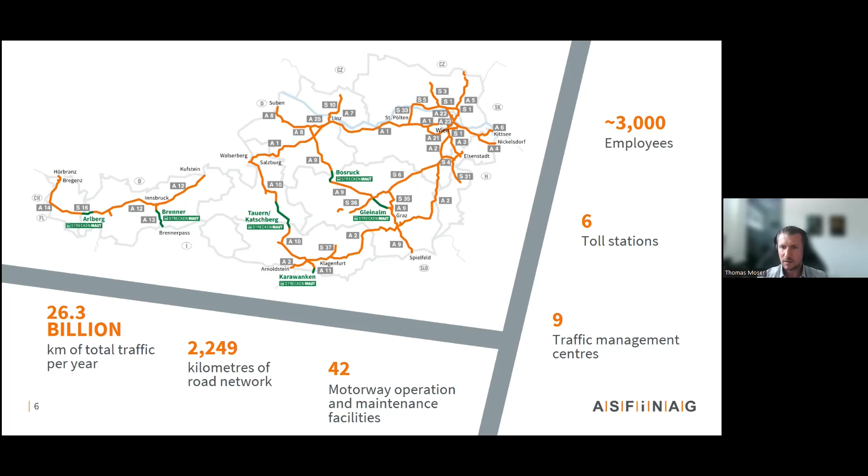And furthermore, we have 6 toll stations for our special toll routes. These are, for example, the Karawankentunnel, Tauern-Katschberg, or the well-known Brenner. And all these tasks are provided with about 3,000 employees.

So let's get to our main assets. What are the main asset categories next to bridges?

First of all, we have the pavement, which is one of the most important asset classes of all infrastructure owners. We have a total length of 2,249 kilometers, which means 12,200 lane kilometers, and an area of approximately 53.55 million square meters of pavement and asphalt, where about 2/3 is asphalt and 1/3 is concrete pavement.

The next important assets are the bridges. We have 5,818 bridges with a total area of 5.8 million square meters, which means our average bridge is about 1,000 square meters. Due to our topology in Austria, we have, in relation to our net length, a high amount of tunnels.

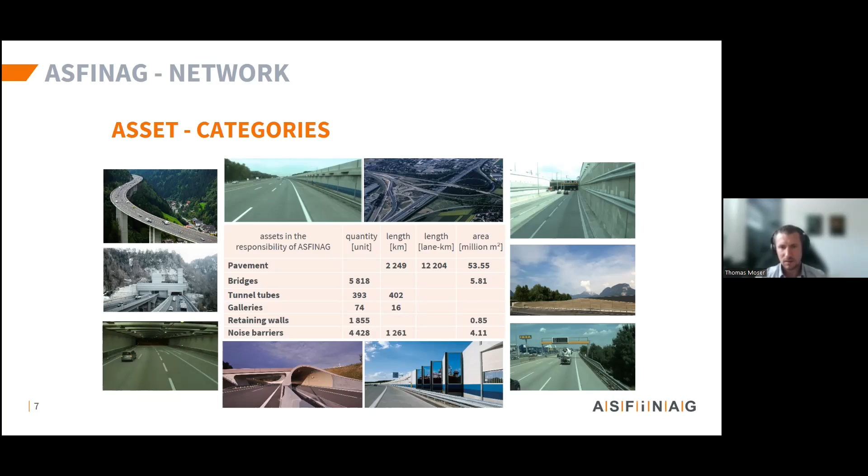We have 393 tunnels with a length of 402 kilometers.

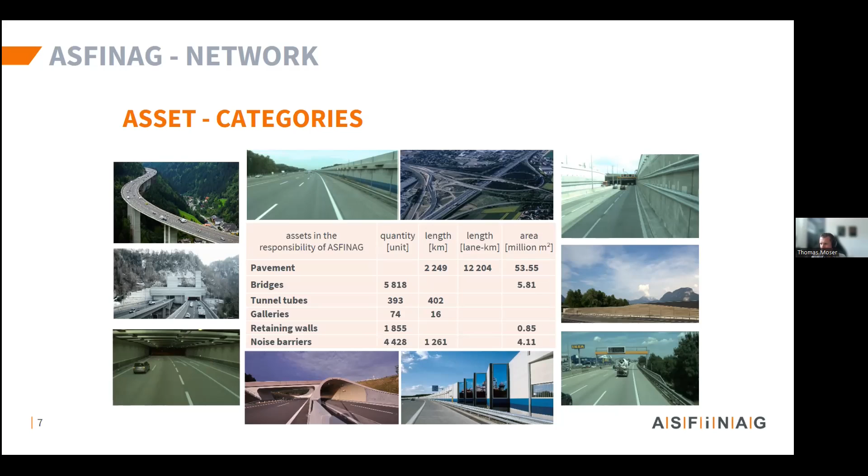The next assets are also very important, but we call them minor assets. So we have 74 galleries, which are often connected with our tunnels, 1,855 retaining walls, and approximately 4.1 million square meters of noise barriers. This area is still rising, so we expect a little more in the near future.

So 1 billion euro for our network.

It goes right through the city of Vienna, and there was an amount of more than 100,000 square meters of bridge maintenance, which cost about 130 million euro. So this is one of the most expensive bridge constructions in 2021.

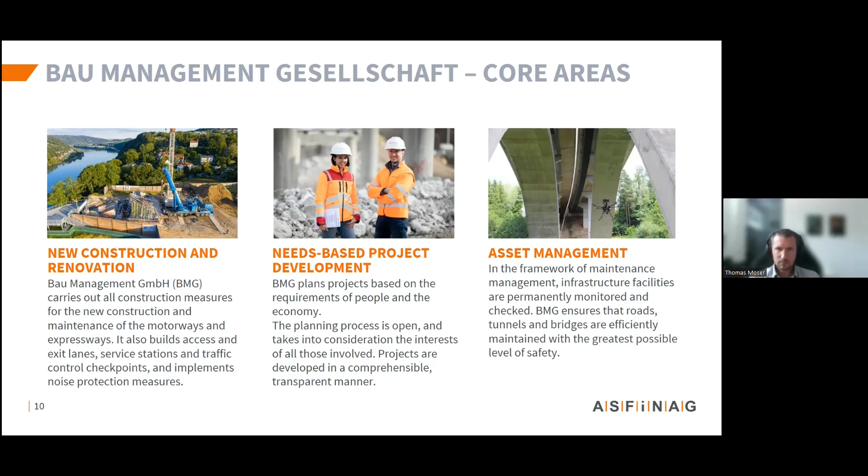All other assets, let's say after 1985, are not relevant at the moment, but they will be relevant in the future. So this is a very important thing.

And when we look 30 to 40 years into the future, there we have a huge renewal time coming for our bridges in the network.

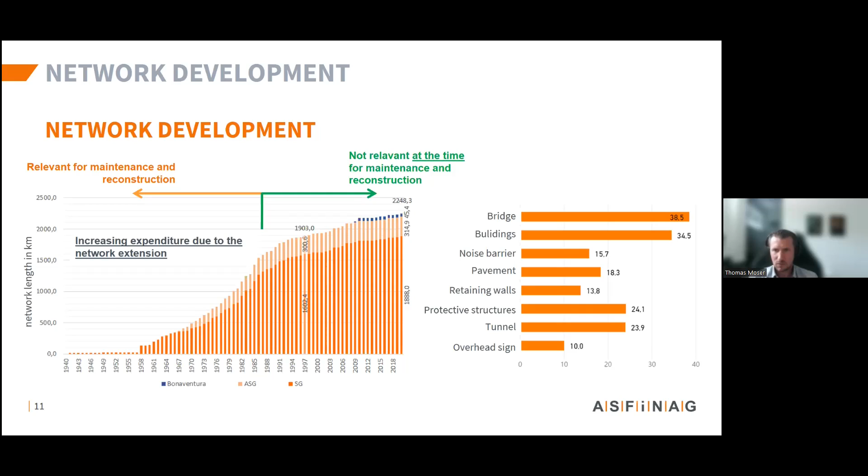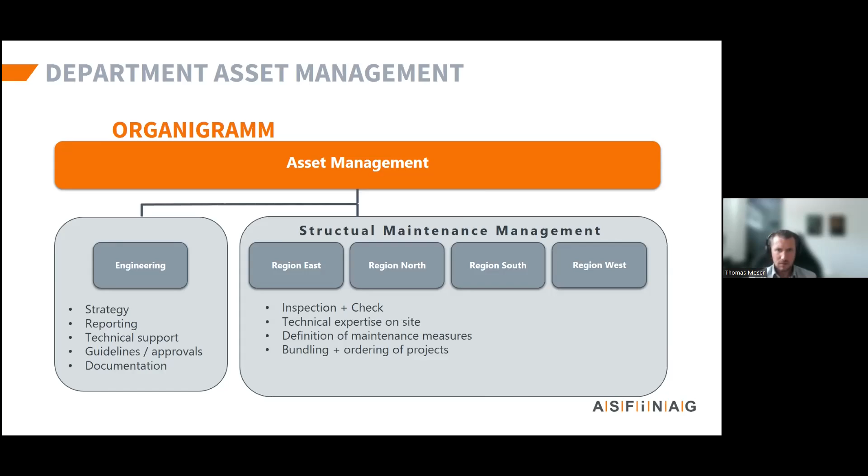So I told you something about our maintenance strategy. To fulfill the targets of the company, a maintenance strategy was developed in the past based on the mission of ASFINAG. We divided it into 3 different levels to manage our goals.

The first level focuses on the main strategy, which is anchored in the mission. One of the main strategies for asset management is that we offer our customers a maintained and repaired network and use the available resources responsibly. From this main topic, we developed our maintenance strategy, divided into 3 columns: network safety, network availability, and planning reliability.

For example, for structural safety, we have to have defined measures for our structural engineering buildings if we have a condition rate of 4 or 5. These defined measures could be a building measure, a reduced inspection interval, monitoring, or organizational measures such as lane closures, for example.

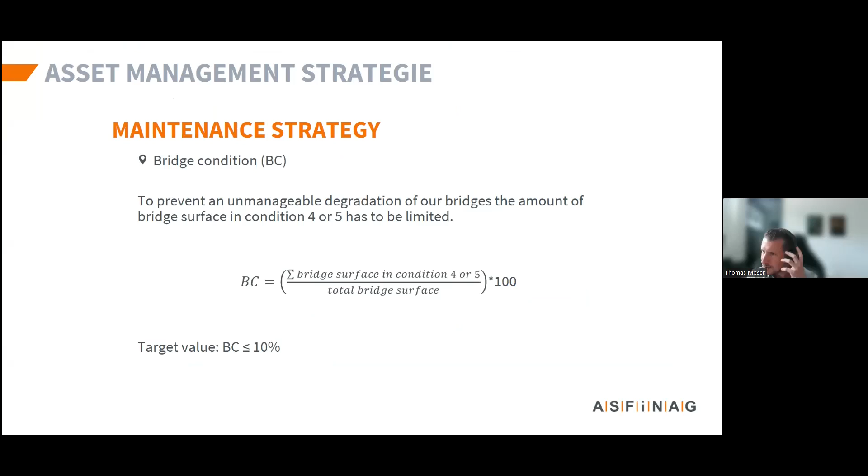The reason why this KPI is in the column network availability is because with a high amount of bridges in a bad or very bad condition, we are not able to provide an available network according to our targets. We want to manage our projects, not be managed by them. So we try to limit the bridges in a very bad condition.

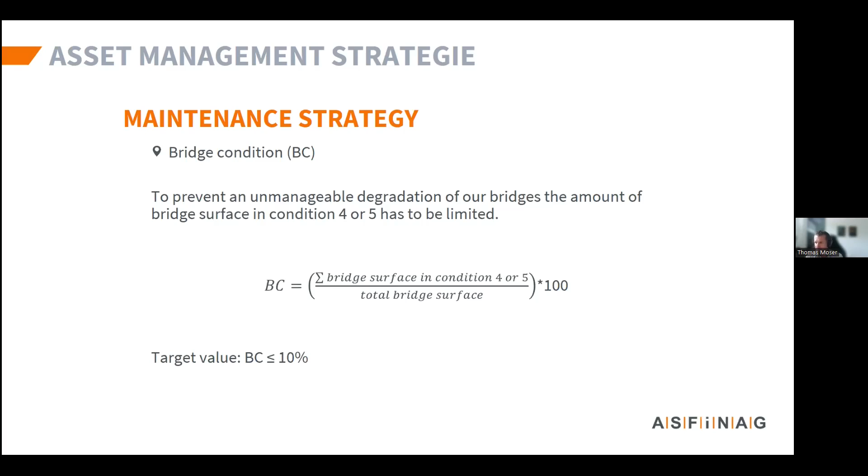Actually, we have about 7% of our bridge surface in condition 4 or 5, but just one bridge is in condition rate very bad, and this will be reconstructed next year. So 7% in condition 4.

So what are the management tools we use to manage our assets? We distinguish our tools in two main groups: software tools for operational activities, and software tools for reporting and analysis.

On the one hand, we have the infrastructure management tools, a tool for the visualization of the pavement condition, and some other project management tools, for example project request management and project management system.

On the other side, we have software tools for reporting and analysis. For example, the pavement management analysis tool, dTIMS, and a common Microsoft tool, Microsoft Power BI, a business intelligence tool, where we are able to show information from different databases and combine data so that we can gain knowledge from the different data and information.

This slide shows the front end of the infrastructure management tool. On the right-hand side, you see a view of a handheld, which is used for our inspections and checks on site. Colleagues are on site with a tablet, iPad, or another handheld, and do the inspections and checks online.

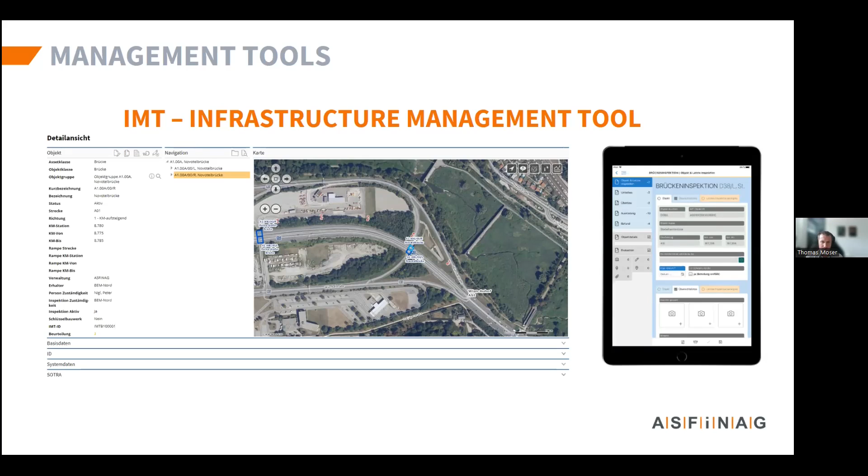Then we transfer all the data into our database. The front end here is the program ProOffice, and all the data is organized with this program. This is our main tool to organize inspections, checks, and to organize our data.

And for the pavement, we have a tool for the visualization of the pavement. This slide shows the front end of this software, and we have the possibility to visualize structural index, comfort and safety index, and other condition indexes of our pavement.

In the future, we will also be able to show information from our construction program so that we can directly see the pavement condition in the affected areas or in the planned maintenance areas.

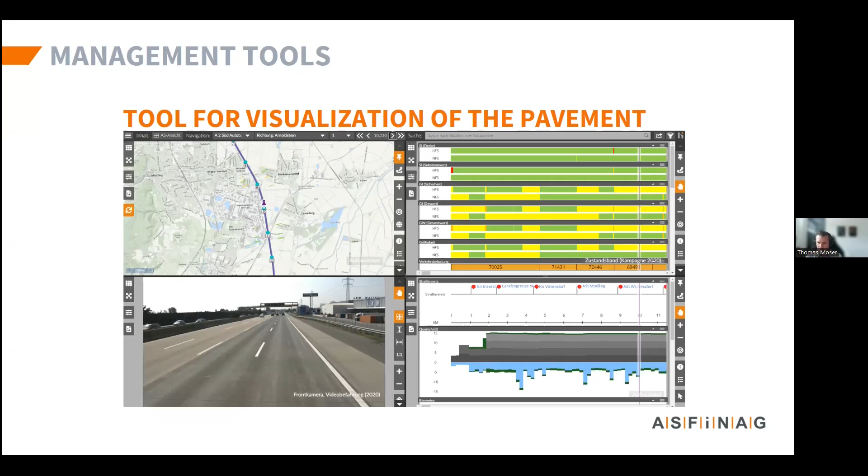One of the most powerful and most used tools in ASFINAG since about 1 or 2 years is Power BI. Here you can see especially a dashboard which provides some information on our bridge portfolio. On the right-hand side, we can see the amount of bridges in different conditions.

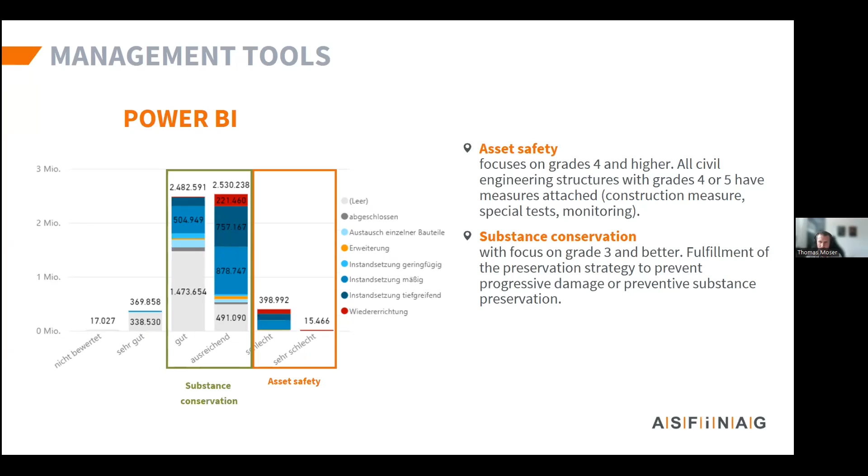So, the next thing is the calculation of bridges at ASFINAG.

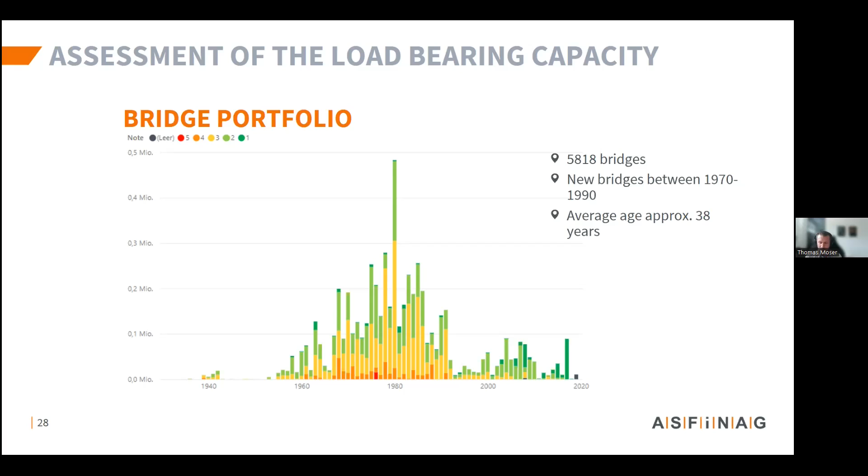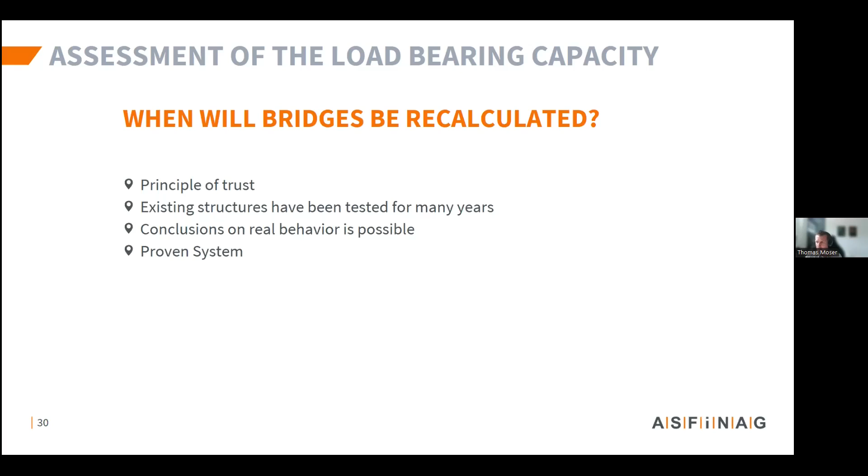So when do we recalculate? In general, we have the principle of trust. We trust those who calculated and designed the bridges in the past. Existing structures have been tested and used for many years, and we have conclusions on the real behavior. It's a proven system. So why should we recalculate all of our bridges?

But sometimes there is a need for recalculation in case of statically relevant damages. For example, during an inspection or during checks, we see statically relevant damages, statical problems, and something like this. There is a huge need for recalculation.

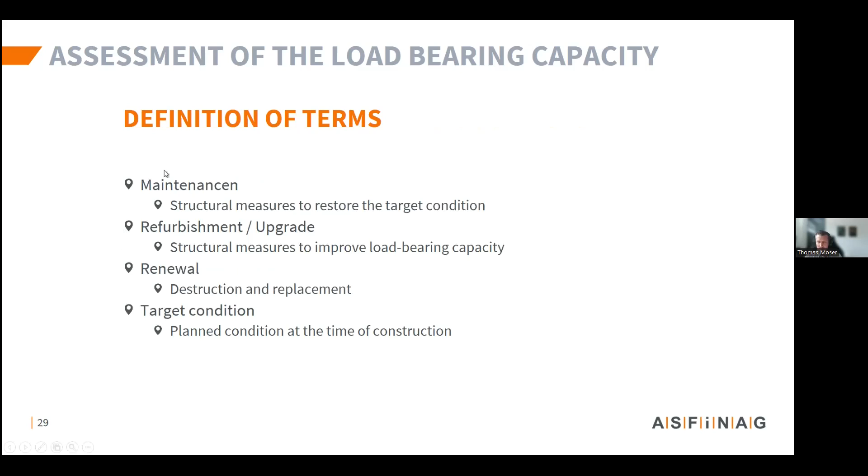This is before interventions in upgrading the structure, which is why I wanted to define those terms. We just need to recalculate when we want to upgrade our structures. With standard maintenance in Austria, there is no need to recalculate our bridges.

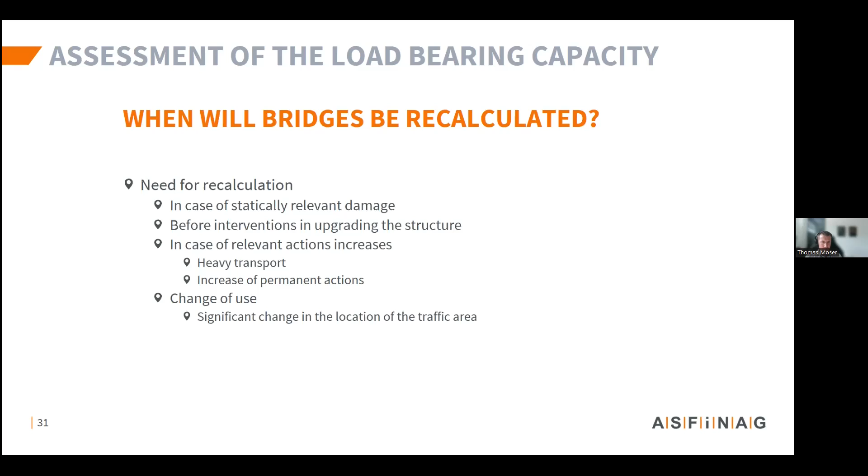This is therefore the assessment of the load-bearing capacity of existing bridges. If we have to recalculate our bridges, we have 4 different steps to do so. The first step is a recalculation according to current regulation, the current Eurocode. For example, if everything is fine with this bridge, step 1 check is done. But most of the time, we can't fulfill all the requirements.

So then we get to step 2, the recalculation of the bridge with updated data. We are able to use actual material parameters of steel or concrete if we verify this updated material data via tests. We are also able to reduce the partial safety factor on the resistance side if we prove the real dimensions on the side of the system—check the length, the width, the spans, something like this. If we do so, we are able to reduce the partial safety factor only on the resistance side.

And if we fulfill all requirements, check, we are done, and the recalculation is finished. If not, we have two more steps we have the possibility to do. Step 3 is an assessment of the reliability according to the Eurocode, and step 4 is accepting a reduced level of reliability.

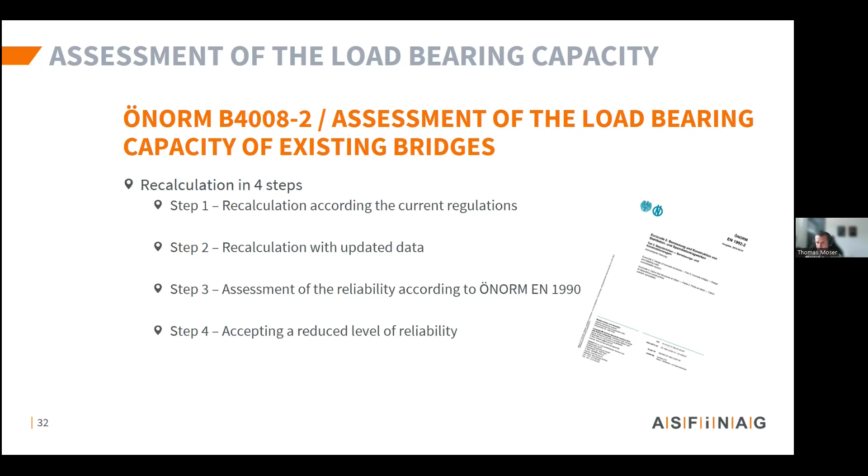So this was a brief and short overview of the assessment of load-bearing capacity of existing structures. I think it was very quick. I'm at the end of the presentation, and I hope I could give you a brief view inside ASFINAG, how ASFINAG is organized and how we manage our assets, so that we now have enough time to answer some questions. Thank you.

Okay, thank you, Mr. Moser, for this very nice presentation. I'm sure there are a lot of questions now, and one is already here in the chat. I don't know if everybody sees it. Mr. Roberts Ozins asked a question which was in a way already answered, but I think it would be nice to elaborate on it. Mr. Ozins asked, what asset management system or program are you using? And if it's a commercial or off-the-shelf system, or how do you solve this issue at the organization?

Our infrastructure management tool is a customized program which is off the shelf. So we bought a software license and customized it to the needs of ASFINAG. Power BI and all these analyzing tools are off-the-shelf Microsoft programs. Okay, I hope that answered the question.